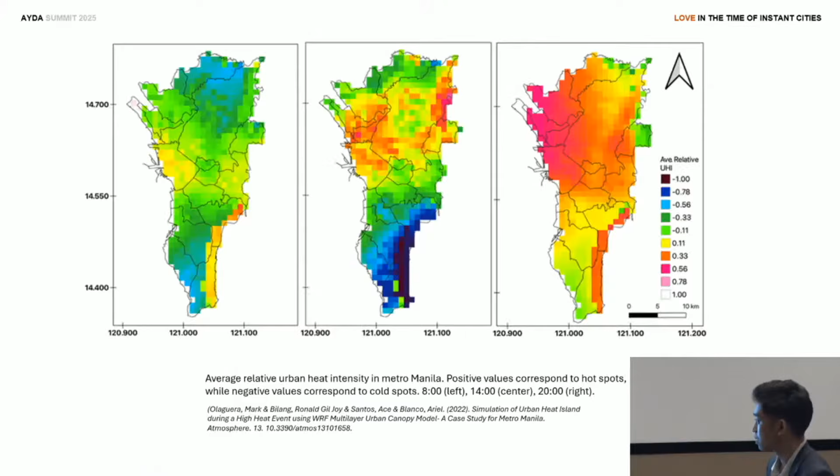Looking at this map of Metro Manila, we can clearly see the areas suffering the most intense heat. The red and pink zones are Manila, Makati, Quezon City, and Pasig, all of these districts near the Pasig River, a 27-kilometer waterway that connects major cities of Metro Manila and Rizal. Along the banks of the river are dozens of underutilized land that we can use as green lungs of the city.

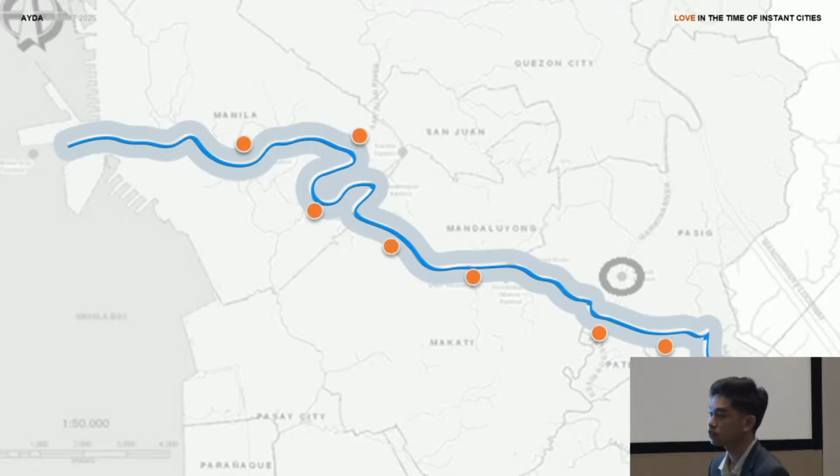One particular example is the Pandacan Oil Depot, located along the bank of the river. It has long served a critical role in the storage and distribution of petroleum products that supply the metro. But time and time again, incidents have shown us just how dangerous it is to store and transport hazardous materials right in the middle of the city.

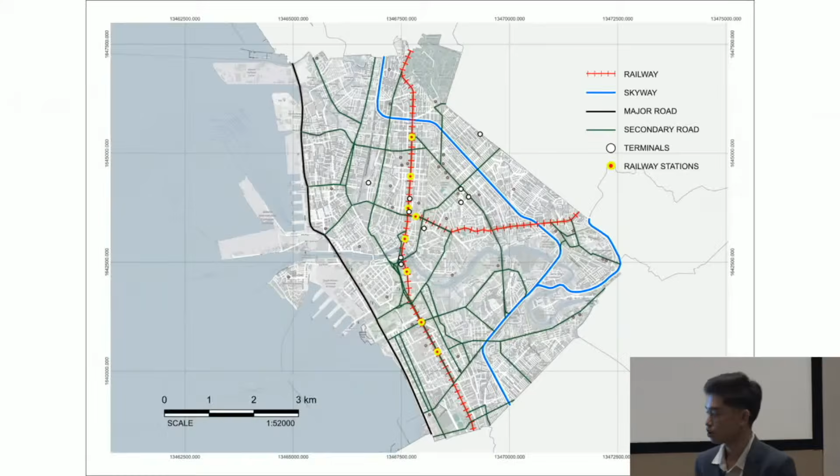In fact, in 2005, a health survey proved that the air surrounding the oil depot contains high levels of benzene, a chemical compound known to increase the risk of cancer. That is to say that the community is not only at risk of explosion, but is breathing in poison every single day. But by 2015, the Pandacan Oil Depot shut down completely, leaving a vast industrial site right in the middle of Manila, surrounded by both homes and businesses, waiting for its next purpose.

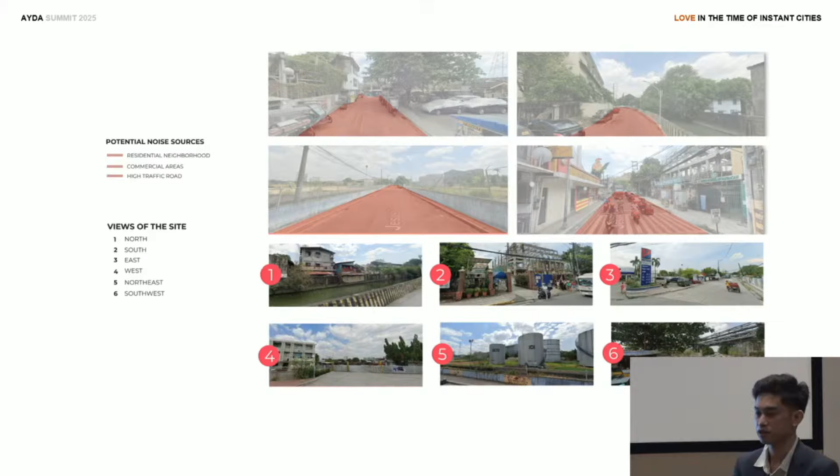With the oil depot gone, we're given a moment in the time of history to redefine an industrial landscape, not as another profit-driven development, but something that actually works for both people and nature. This is where we transition from a macro perspective to a micro lens, focusing on how we can transform Pandacan's industrial landscape as a model for urban renewal, ecological restoration, and social inclusivity.

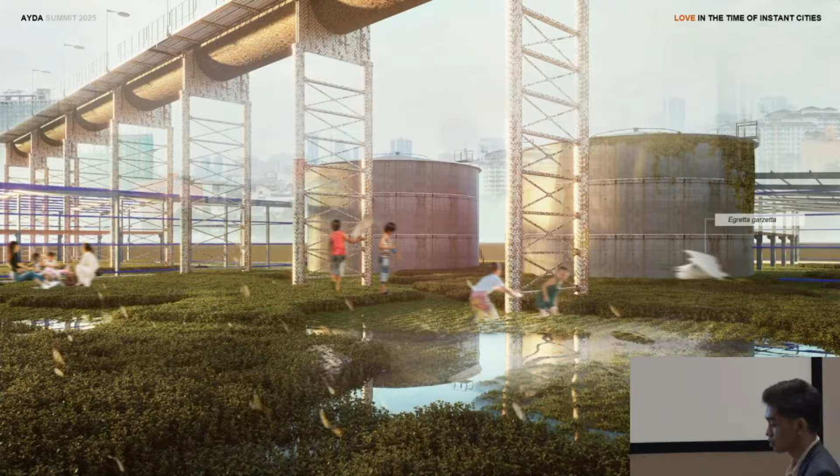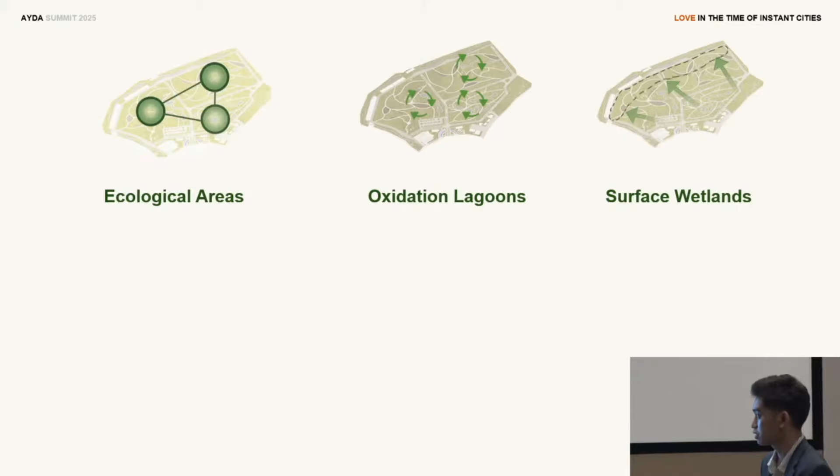Our goal for Pandacan was not only to build, but to heal, to reconnect, and to redefine what this place could be. Central to our approach is to allocate 70% of land for vegetation coverage. Instead of concrete, we're having ecological areas, oxidation lagoons, and surface wetlands that restore biodiversity, improve air and water quality, and help mitigate flooding.

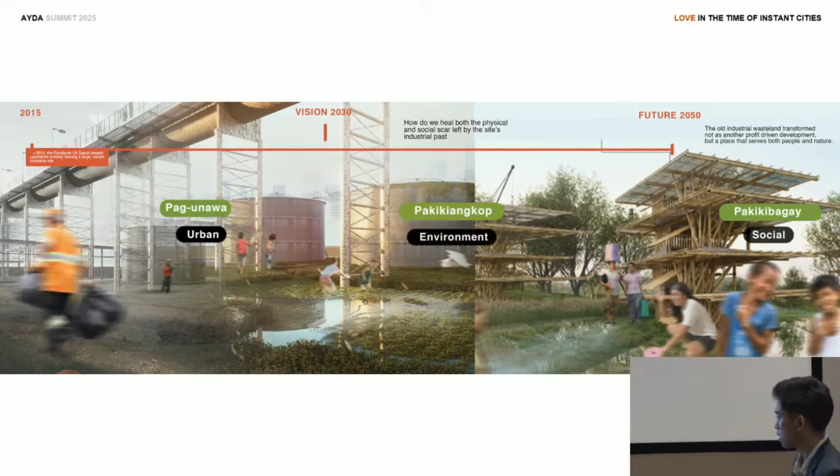We structured our strategies into 3 key dimensions: urban, environment, and social. First, the urban. For such a very long time, the Pasig River has been treated like a boundary or an afterthought in urban planning. But what if instead of seeing it as a divider, we saw it as a spine for both social and ecological network?

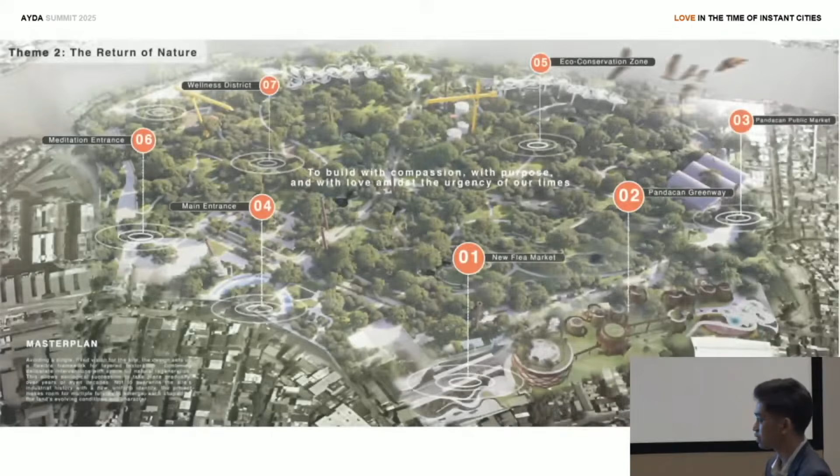Currently, the edges of the Pasig River are covered with concrete infrastructure, rigid barriers that not only disconnect people from the river, but also increase its chances of pollution. My solution is a series of regenerative landscapes which are cost-effective, and by doing so, we're already limiting the baseline heat that we're going to respond to.

The process begins by capturing water from the river, and then it gets filtered in our gabion walls before it gets to our subsurface wetlands, and then stored and recharged in our oxidation ponds. The clean water is then returned back to the river.

But how do we make sure that this is not only ecological, but also social and economic? This is where our second and third dimension comes in: urban and social.

Retrofitting the old existing tanks opens a lot of possibilities in reimagining the Pandacan as a vibrant community hub. The entry will be framed by a retaining wall guiding the user in a deliberate descent. The ventilation will be facilitated by low-level intakes that will support natural airflow.

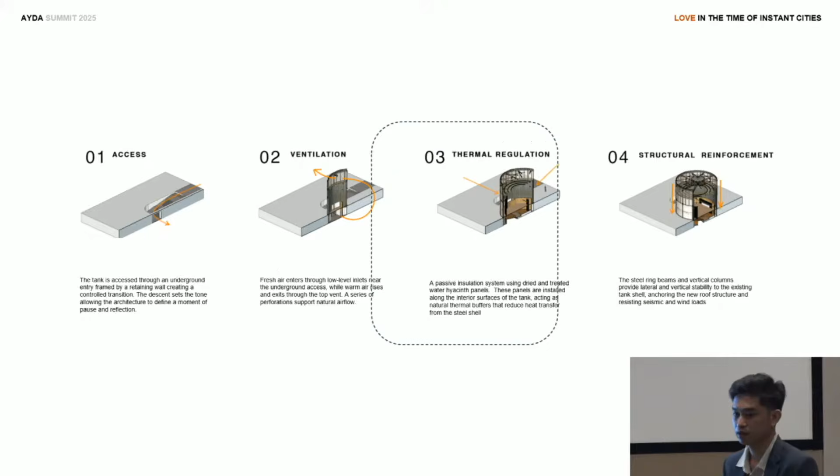For thermal regulation, we're going to be using dried water hyacinth directly harvested from the Pasig River. Those water hyacinth will be used as the paneling for the building and the steel shell, which will act as the buffer of the steel plate. But more than just sustainable, it will also become a form of community co-creation in which we involve the local community themselves in the process.

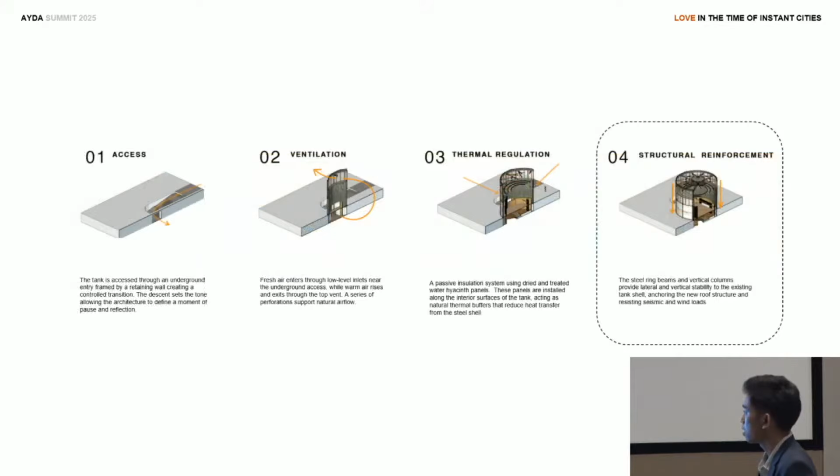And structurally, we're having a radial beam system that is anchored on a compression ring that stabilizes the entire roof assembly.

By recognizing how Filipinos get excited over pageants, basketball, and boxing, or any events that bring people together, I developed 3 building typologies that respond to the local habits.

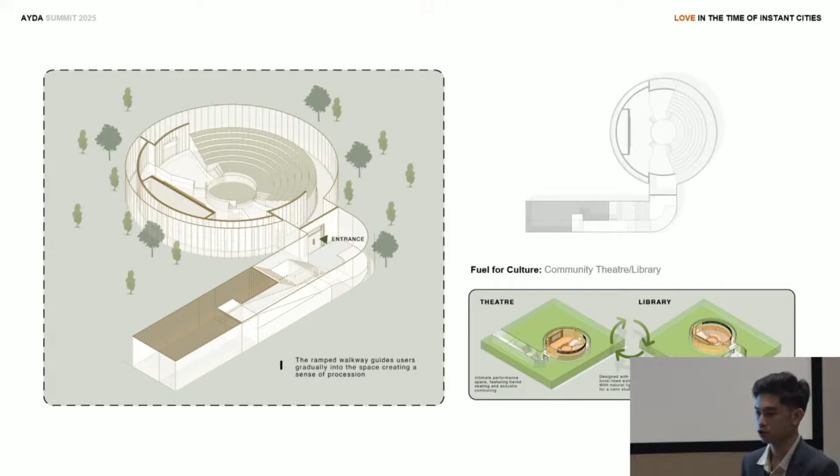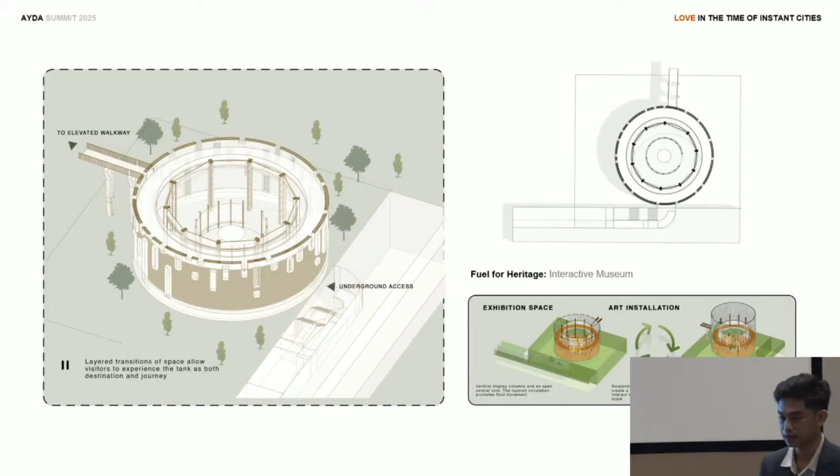The first building typology is a fuel for culture, which is an indoor community theater and an indoor library. The second typology is a fuel for heritage, which is an interactive museum that commemorates the historical legacy of the site, lined with the stories of the laborers themselves.

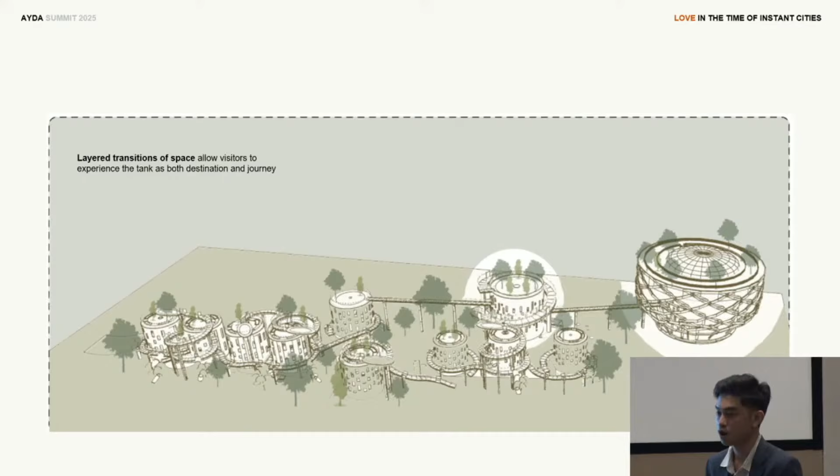All those building typologies will be linked by a network of undulating walkways, which are a layered transition of space that allow the user to experience the tank as both a destination and a journey.

A multi-generational zone that fosters interaction, memory,

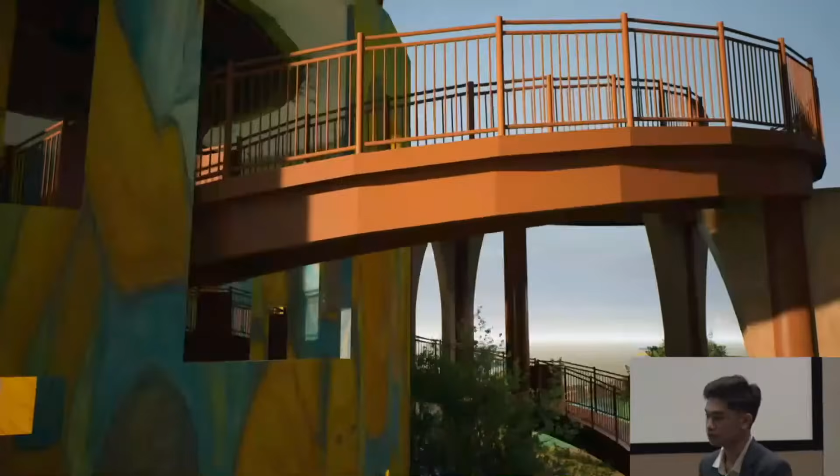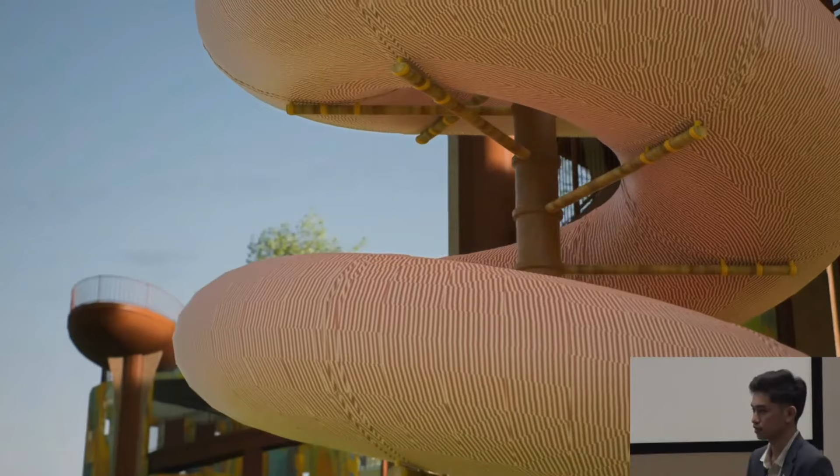Sorry, the clicker's not working. Do you need to replay?

No, okay. A multi-generational zone that fosters interaction, memory, and connection among different age groups of the community.

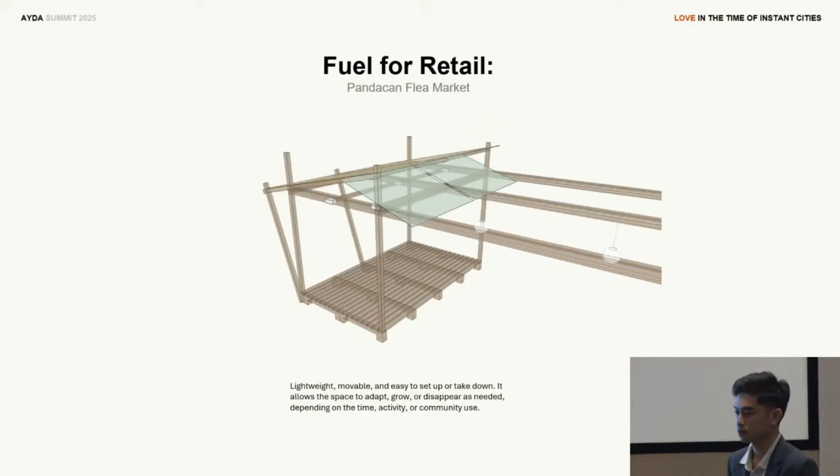And as fuel for retail, we have an adaptable flea market, which is flexible. Foldable tables and stalls will give rise to microeconomies that could empower thousands of families without the need for expensive materials, since most of our materials are locally sourced, allowing for incremental growth.

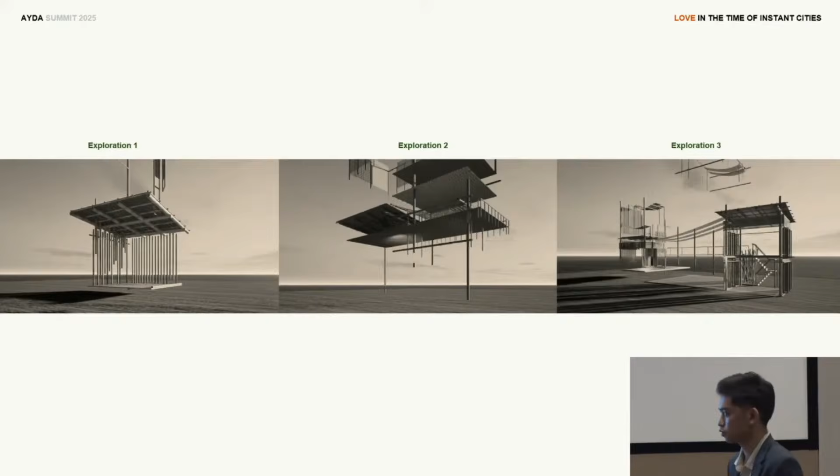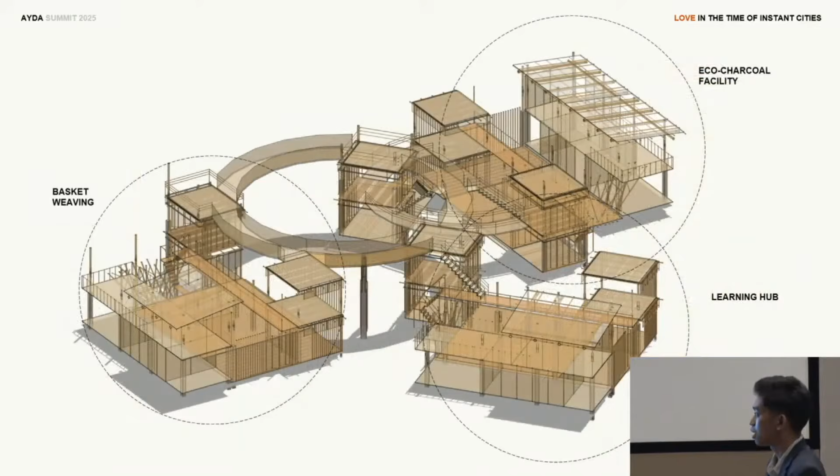Our community centers are built with permeability in mind, allowing wind to bypass the structure, thereby reducing pressure and wind load. Our community centers are organized into 3 functional zones.

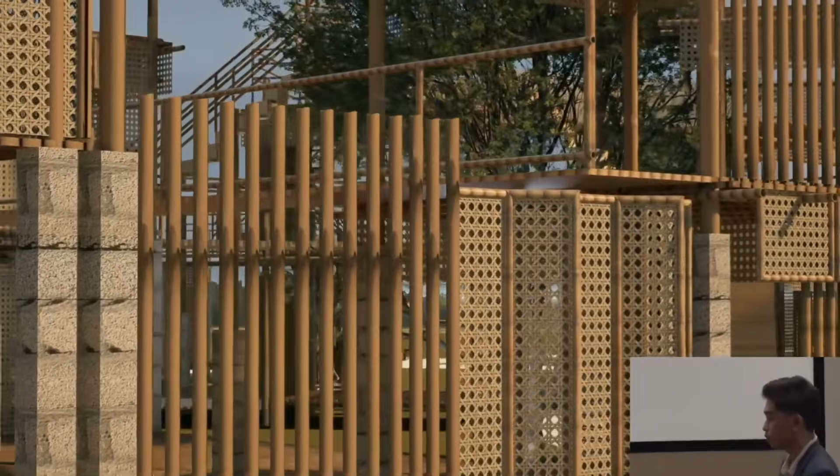The first zone is basket weaving, in which we transform the dried water hyacinth into handcrafted bags. The same material will also be used for the paneling of the building itself.

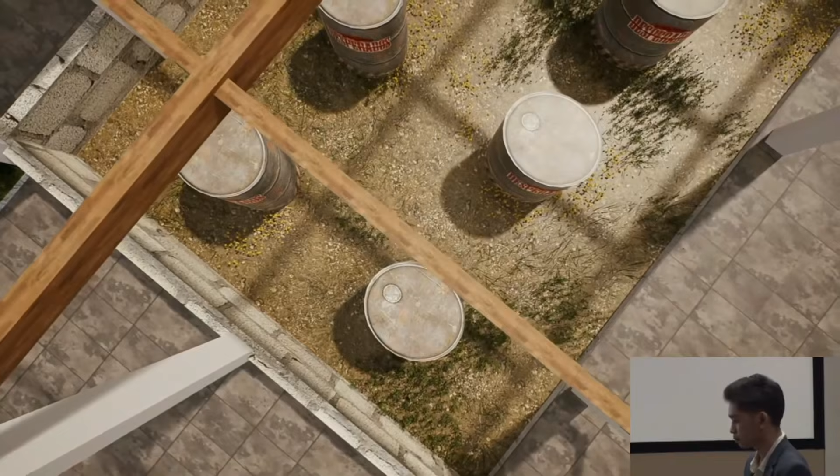The second zone houses an eco-charcoal facility that transforms the dried water hyacinth into eco-charcoal briquettes, while an inclusive learning center supports skill building and education, in which we also offer labor and employment, even for PWD members of the community.

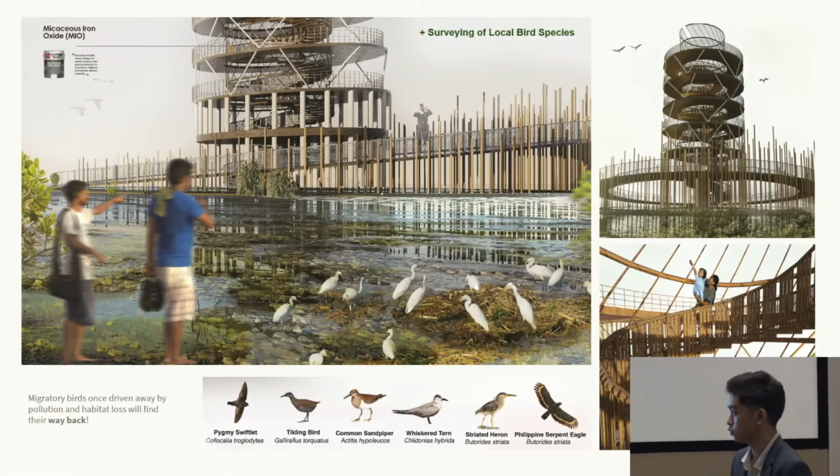And by restoring the site's natural ecology, we're also bringing back the migratory birds which were once driven away by pollution. And by doing so, we're having birdwatch towers that are carefully integrated with the site's microzones and water systems.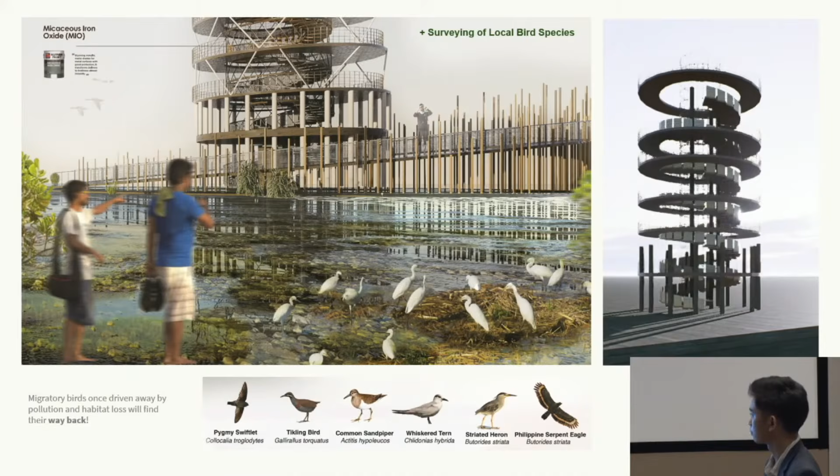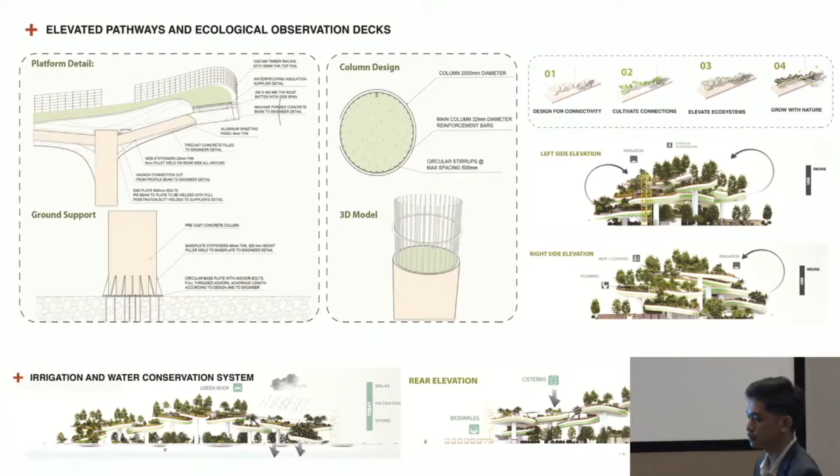A collection of 11 floating pods will be put in front of the site, with each precast pod developed on a tiling pattern and an independent column structure that are prefabricated.

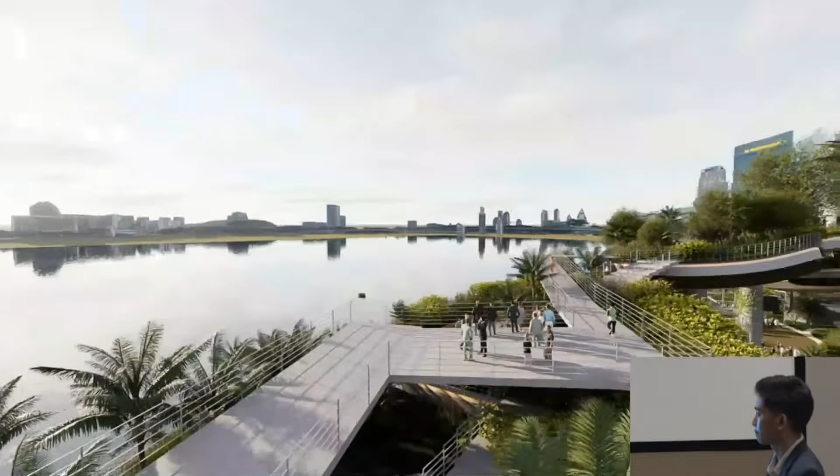Each pod will be planted with native plants and landscapes that will help diversify urban nature. A series of connecting walkways and ramps will be placed in between the pods to enable continuous movement of people along the waterfront.

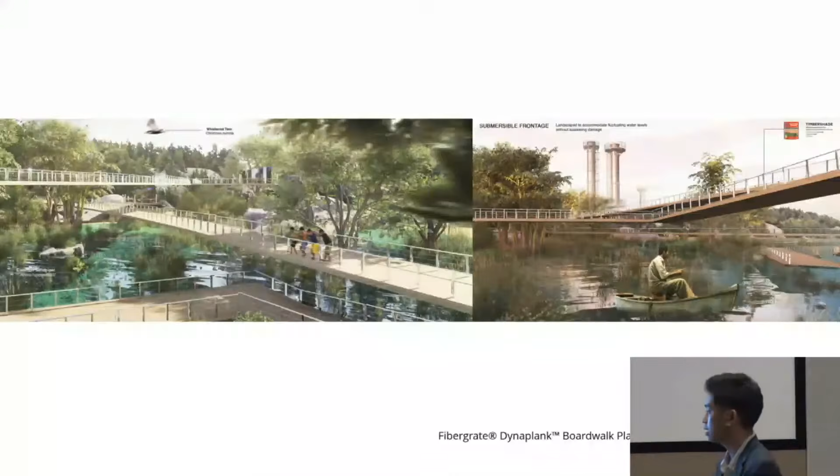Our pathways and boardwalks are going to be made using FRP grating, which limits the slippery hazard, and for the project to be functional even in wet seasons.

And as consideration for sanitation of the area, we have an eco-toilet design that uses urine diversion techniques and dry composting.

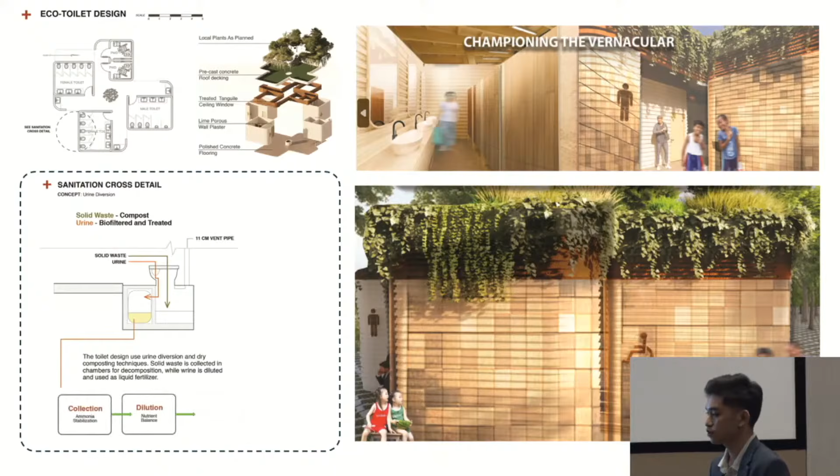All of these interventions have the goal of reclaiming the narrative of the site, restoring what was once lost, both in nature and in memory.

Going back to my hometown, last year I got to spend time with my inay again. And just like when I was a kid, she would ask if I had already eaten, and she'd try to make sure I was okay.

But this time, it was my turn to take care of her and sit beside her the way that she used to sit beside me.

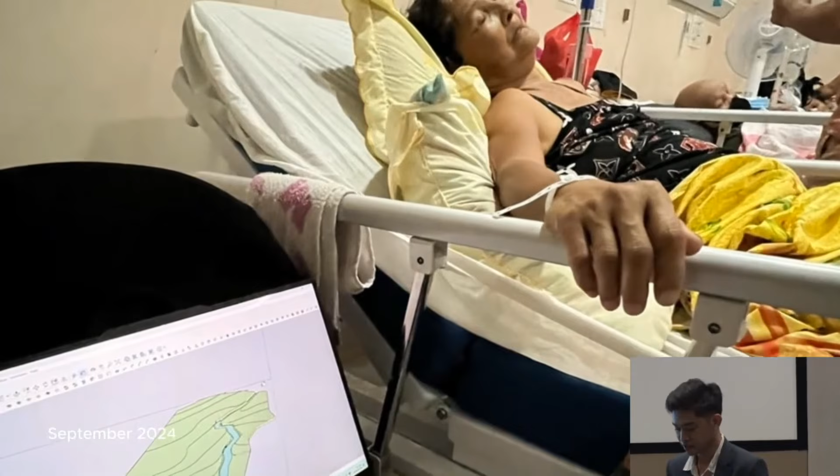And just like working on this entry beside her was a memory I will forever cherish, but it will also be my last memory of her. She never got to see my entry finished or see how it all came together.

But with everything that has happened in these past months, working on this entry has taught me many things. It taught me about memory, it taught me about people, but more than anything, it brought me back to where I began, on trying to understand what it means to keep something alive as a way of remembering and a way of returning.

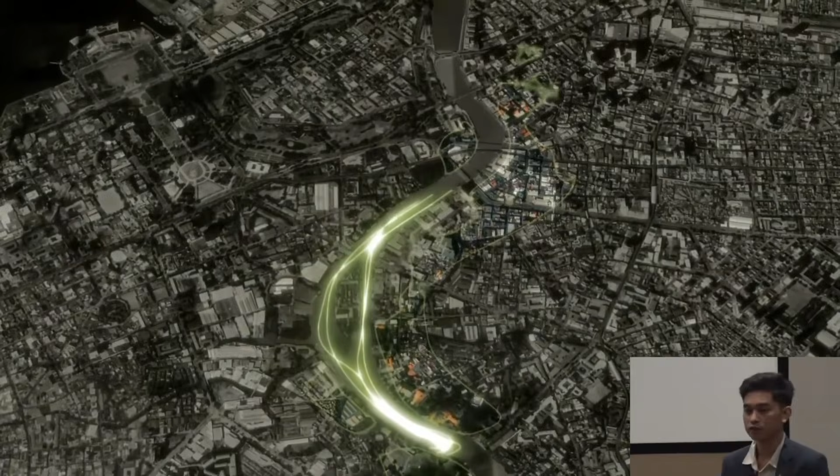In a world that is constantly rushing to build the next big thing, we begin to lose the things that make us feel grounded. The love that I've learned back home, in the quiet, in the soil, and in the hands that raised me, is the kind of love that our cities need to remember.

That for me is what it means to build with compassion, with purpose, and with love in the time of instant cities. Thank you.